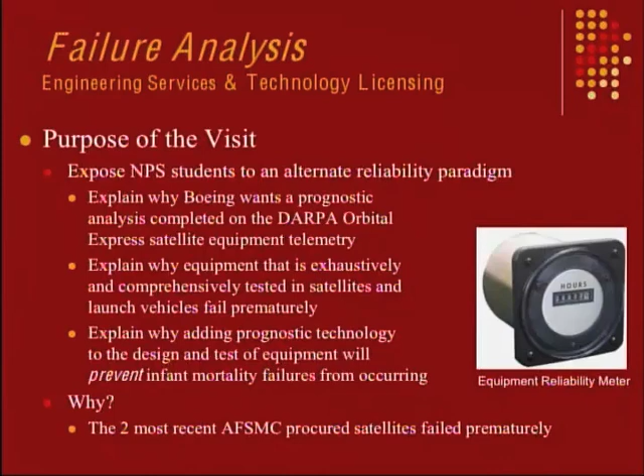The AEHF satellite, the communication satellite — the apogee engine didn't function, it wouldn't stay on continuously. The Air Force had such low confidence in the builder, Lockheed Martin up in Sunnyvale, that they directed Lockheed to test the satellite completely twice, hoping that what happened on orbit wouldn't happen. It happened anyway.

The GPS-2F satellite that was just launched, one of its payloads, the nuclear detonation detection subsystem, wasn't interoperable with the existing satellites on orbit. So I'm going to tell you today how that can happen, how the Air Force can procure equipment that fails prematurely, as well as how the builder can build equipment that fails prematurely.

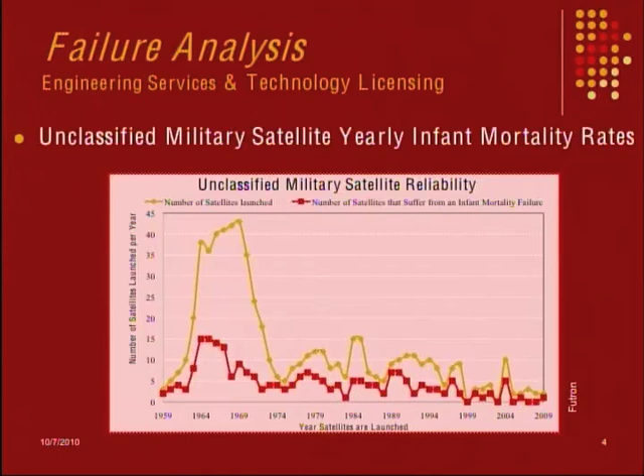To begin with, I'm going to talk a little bit about how often space vehicle equipment fails prematurely, tied in with the Orbital Express mission. This chart shows in red the number of satellites per year that failed since 1959 within the first year of use. The actual numbers aren't important, it's just to show that every year since 1959, a small group of unclassified military satellites failed prematurely. The more satellites that are made, the more that fail prematurely.

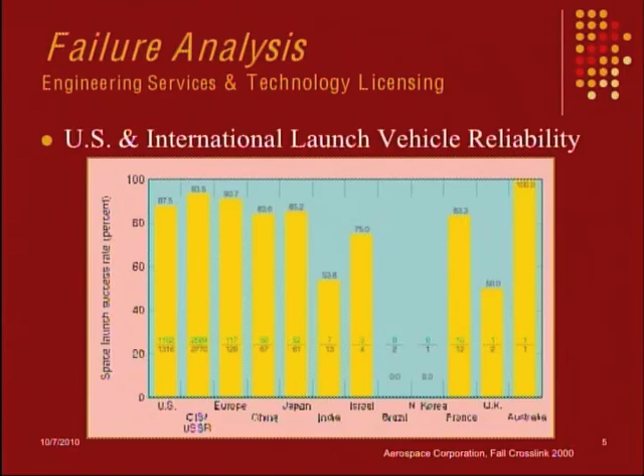This is a chart that's almost unreadable, but these are for launch vehicles, U.S., Russian, European, Japanese, etc. This is the percentage that have been successful. You can see 100%, and about 10 or 15% of U.S. launch vehicles failed prematurely, and likewise for all the different countries. I'm going to elaborate on this data in just a little bit.

This is just a summary: using game theory to understand launch vehicle and spacecraft reliability. This is kind of a new application of game theory.

What these are called are learning curves. When a guy decides to sit down and write a video game, he's interested in knowing how difficult he should make it. These graphs show effort on the bottom versus results. This is just a regular learning curve. This would be a shallow learning curve. This is a steep learning curve. This is a learning curve created when you can build on your experience. This is a curve where there's virtually no learning necessary — we call that being able to use intuitive reasoning.

This learning curve shows 3 different video games. If you learn how to play this video game here, then you can use it on the next video game and the subsequent one. That's sort of the way people who play video games would like it to be — you learn to play one very well, and you'd like to use that skill on another. This chart just shows results with no learning curve whatsoever.

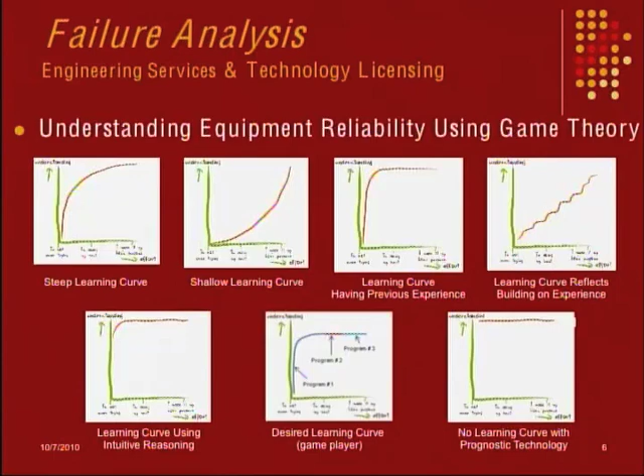So this is the information that's really important to understand reliability — effort again versus results. This is data produced by Aerospace Corporation, for launch vehicles — every launch vehicle the U.S. has produced since 1956, including the Russian launch vehicles here.

Both operational launch vehicles as well as historical launch vehicles. I just wanted to show you these are the learning curves for these launch vehicles. Mind you, some of these launch vehicles have been produced and used for up to 50 years, and the best that they can do is roughly about 90%.

So what these curves show — the fact that every launch vehicle, even the shuttle, where's the shuttle at? Even the shuttle had one of those learning curves that was on the previous chart. This indicates that absolutely no experience was used from one launch vehicle program onto the other.

When a vehicle, such as a satellite or launch vehicle, has a learning curve of this size, which matches the initial learning curve on the previous chart, it's indicative that no experience was used. That means the Air Force, the military, was never able to share experience among launch vehicle programs. We can do the same curves for the standard product lines of satellites and spacecraft that companies now produce, dating back to the early 1980s.

The spacecraft — the satellites that are often sold for military applications, produced by the dozens and dozens — share the same kind of learning curve. Again, that's indicative that we're not able to share experience across programs.

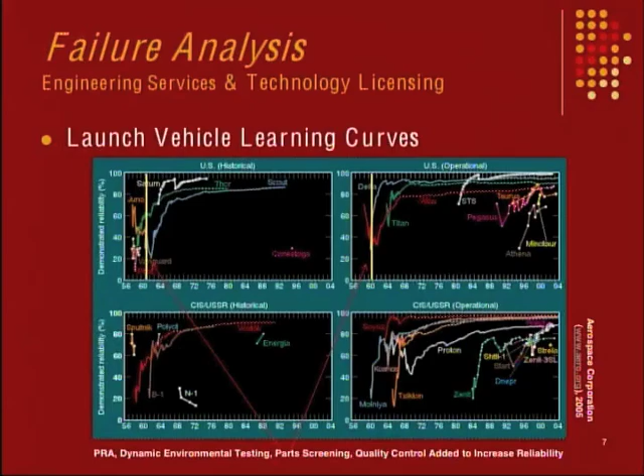Although the company's name is Failure Analysis, we don't do failure analysis. We went to the next step. We're not interested in doing analysis for equipment that failed — we're interested now in stopping equipment from failing prematurely altogether.

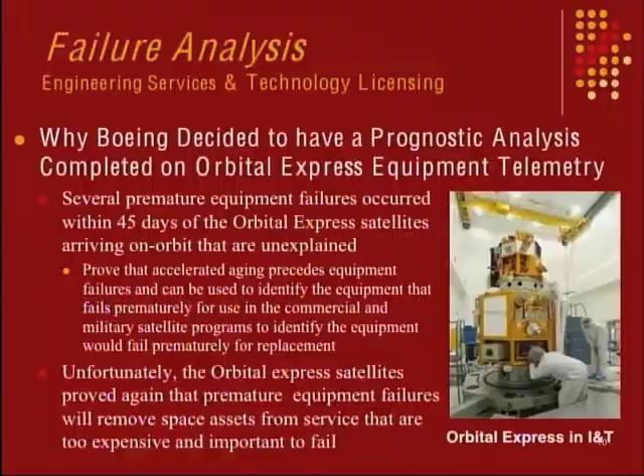We want to stop, we want to have contractors produce equipment that will not fail prematurely. We believe that space systems are too expensive and too important to fail. And so the technology that we offer now is a result of understanding why equipment fails in the first place, so that you can eliminate those failures from occurring in the future. Also in today's lecture, I hope to explain to you why the tools called failure analysis and root cause analysis are the wrong tools to use when you want to produce equipment that won't fail prematurely.

This is a chart that was developed by Aerospace Corporation. Back in 1989, they published a report trying to justify the extreme cost of testing satellites at the factory. They took a look at 60 satellites from a variety of suppliers and went through the factory testing. Mind you, this is equipment that's already passed the dynamic environmental factory acceptance test program - the shake and bake, the vibration, acoustic, EMI, electromagnetic interference, electromagnetic compatibility testing - all of those things done at the factory to try to make sure that whatever is produced won't fail prematurely, that it will be able to meet its mission lifetime.

What they found after this equipment came from the suppliers and arrived at the vehicle integrator was that of all that equipment per satellite, every single satellite of the 60 that went through factory tests suffered 4 mission critical failures. They used this data - these 4 failures - and said, well, if these 4 failures hadn't been found in factory tests, they were going to occur on orbit.

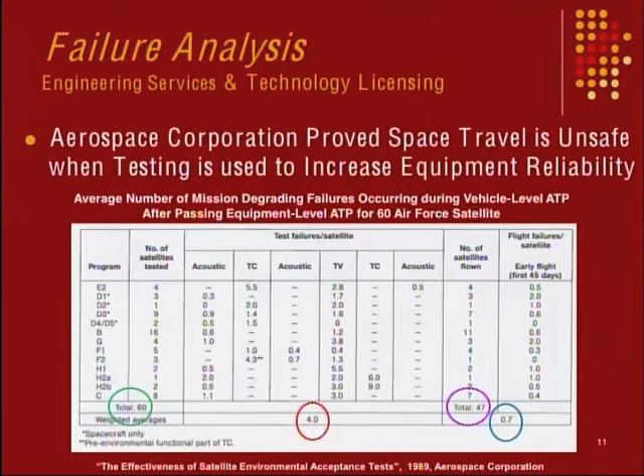The one thing they didn't realize with these 4 mission critical failures was - remember, this is equipment that hasn't gone to space yet, still on the ground, hasn't received the dynamic environment of a launch vehicle, the shock from separation, and things like that. This is equipment while it's still on the ground. They failed to recognize that when you've got 4 units failing per satellite, the factory test process is inadequate. If you're producing equipment that fails prematurely before it ever gets to space, there's something wrong with the process. And that's what they failed to recognize. They just assumed that equipment as complex as this, whenever you work in this environment, it's got to fail prematurely for whatever reason. So they never concluded that the factory test process itself was the problem.

This chart is called a Weibull distribution curve, and it's used to understand failures in time over a 10-year life of a complex system such as a satellite or an aircraft - really any complex system. This chart shows the rate of infant mortality failures, equipment that fails prematurely on a complex system over a 10-year period. The red dots are the infant mortality failures. The blue dots are the normal lifetime failures.

Some of these infant mortality failures actually occur because you replace equipment that failed prematurely, and then some of that replacement equipment fails too, creating this long period of infant mortality failures. We said, well, if you eliminate infant mortality failures here, you are producing equipment with 100% measured reliability. Since equipment reliability is dominated by infant mortality failures, if you get rid of infant mortality failures, you're producing 100% reliable stuff - and that's what we're trying to get to.

And so what we did was we were able to come up with what's called prognostic technology. You're able to identify the equipment that's going to fail prematurely by searching the test data with very specific algorithms, searching for what's called transient behavior.

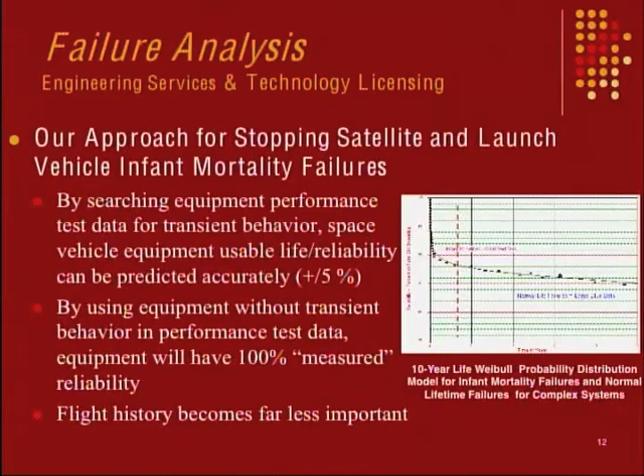When you do this process, flight history no longer is important to reliability. So our approach for stopping satellites and launch vehicles that fail prematurely was we discovered the presence of transient behavior. In other industries, these are called prognostic markers, prognostic identifiers, failure precursors, or accelerated aging. We concluded that the factory acceptance test program was inadequate.

We then discovered that all measurements taken during factory testing are performance related. That means there are absolutely no measurements taken that have anything to do with equipment reliability. All of the measurements taken on equipment at the factory is performance based.

How well is it working? If you've got reaction wheels, are they spinning at 2200 RPM? If you've got an RF transmitter, is it putting out 3 watts? If you've got a 5-volt line, is it remaining at 5 volts? All of the measurements are performance related. That's why equipment has been failing prematurely - none of the testing done in the production of equipment and vehicles for acceptance testing is related to reliability.

So we said, if you want to identify how long the equipment's going to last, you have to develop a measurement that defines the remaining usable life. And that's what I'm here about. So we developed the algorithms that identify the accelerated aging, or the prognostic markers, in the test data. And from that data, we can then calculate how long the equipment's going to last.

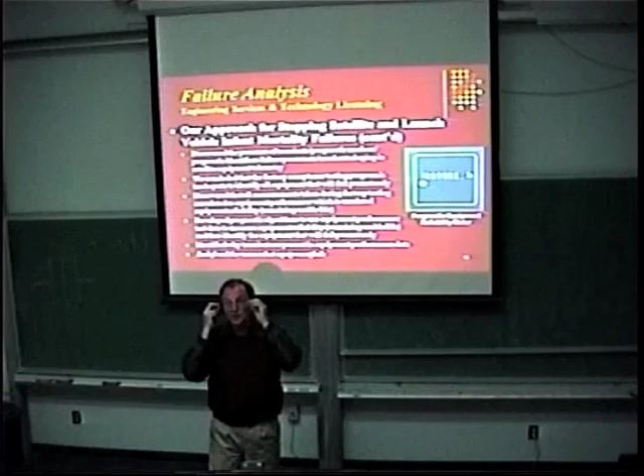Okay. And so what that means for on-orbit satellites, if you're doing this analysis that we offer, is you can identify the equipment that's going to be failing up to 1 year in the future. And so you can then, instead of suffering from surprise equipment failures, which often put the equipment at risk of total failure, you can manage those equipment failures to a positive conclusion.

Quite often, equipment that's going to fail prematurely, once it's identified, if you change the conditions that it's operating in, normally the temperature environment, it can extend the usable life of the equipment. It also offers you an option to turn off the equipment that you know is going to be failing and turn on the backup equipment so that you won't have any interruption in payload services, for instance.

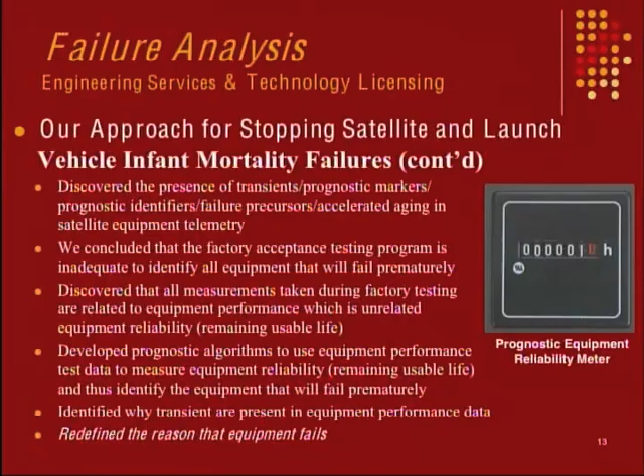And so we've suggested to the NRO that the NRO has very poor on-orbit reliability for their satellites. They're always either not getting up into space or the payload's being turned off because they're having so many premature equipment failures on orbit. This will allow them to be able to predict what their space asset availability is going to be for the next year with great certainty, where right now it's strictly the equipment failures that occur that take the satellite data offline. It just happens sporadically and randomly.

And so we've suggested that the NRO use our ability to do this so that when you're doing strategic analysis, as Strategic Command does when they're trying to figure out, based on the threat environment, what assets are available, it's kind of important to know what space assets you've got in the next year so that you can do that plan. And so that's what our technology offers for on-orbit satellites as well.

So this is just a test plan for the TT&C subsystem, and these are the different tests that are done in the acceptance test program, showing which measurements are taken in which tests. But these are the kind of measurements that are taken for the telemetry and commanding subsystem. Ranging loop stress, a performance measurement. RF output, that's a performance measurement. Bit error rate, that's a performance measurement. Output power, that's a performance measurement. Spurious and harmonic outputs.

These are all performance measurements for equipment. That's why equipment has been failing prematurely, because all of the measurements taken in factory tests are related to performance and not reliability. I think over the decades we kind of hoped that there was some relationship, that if the equipment was functioning normally during test, that meant somehow it was going to last like it was supposed to, and it just doesn't. There's actually no relationship between performance and reliability.

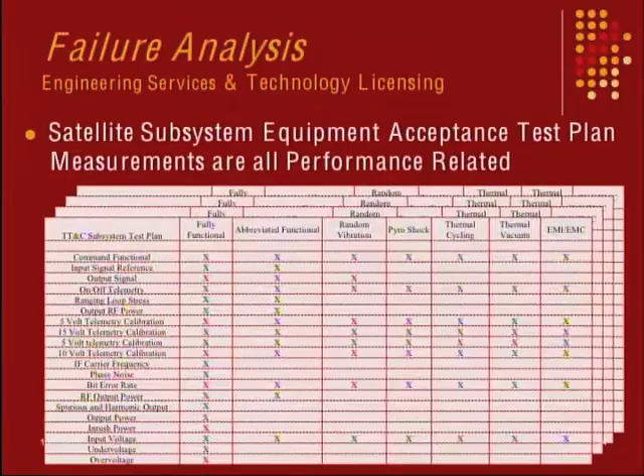And so the existing space vehicle paradigm is presented pretty much in the Mil Handbook 217 or updates of it, which is the reliability analysis. And we call everything that's associated with the military handbook reliability analysis engineering. All of the tools that are used to understand equipment performance and reliability, we call that diagnostic technology. And diagnostic activities, that's things like equipment failure detection, isolation, and recovery activities, failure analysis, root cause analysis, data trending, equipment troubleshooting. Those are all reactionary kinds of things that you do after a failure has occurred to help you understand what happened in the past with great certainty.

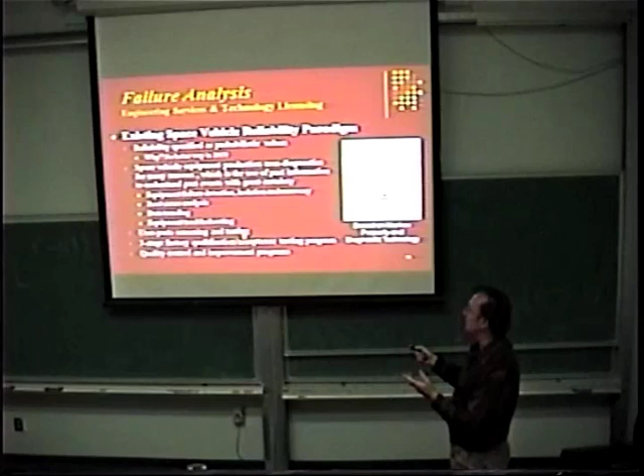And what we're talking about is including things like part screening, where you screen the parts and test them, operate them for a while, trying to do a little burn-in and get the poor reliability ones to fail prematurely, including the three-stage qualification and acceptance test program, and even quality control improvement programs. These are all part of what we call the diagnostic tools that have been used.

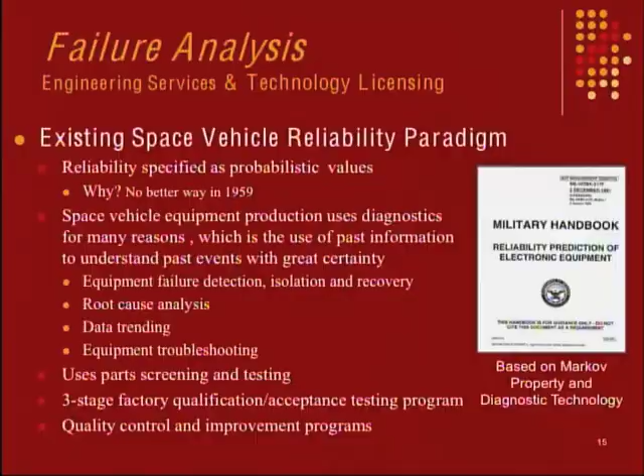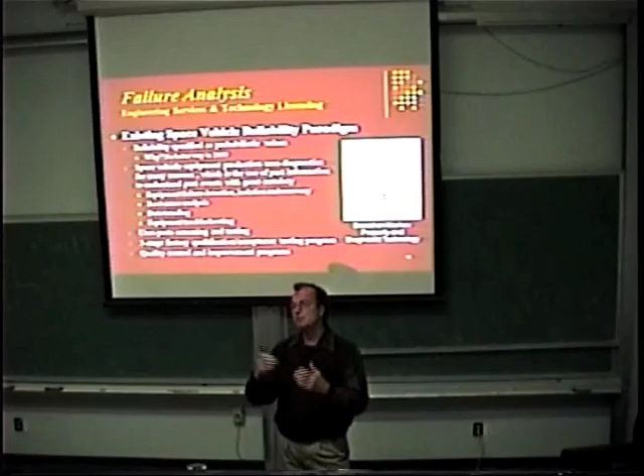What we want to bring about is the tools of prognostics or prevention. When you no longer have equipment that fails prematurely or surprisingly, you don't need diagnostic tools. If the equipment's not going to fail in a surprise manner, you don't need these kinds of things, and it kind of makes them obsolete. And that's really our goal.

The cost to increase the reliability off of this 85% reliability goes to infinite. When you're dealing with probabilistic results, you can never achieve 100% no matter how much money you spend.

And that's why it's such a paradigm change when I talk about 100% reliable equipment versus probabilistic results, where you can never achieve 100. And so it causes people to doubt that it's even possible, because they understand this relationship, that you can never spend enough money when you're dealing with probabilistics to ever achieve 100%. And so it's very confusing.

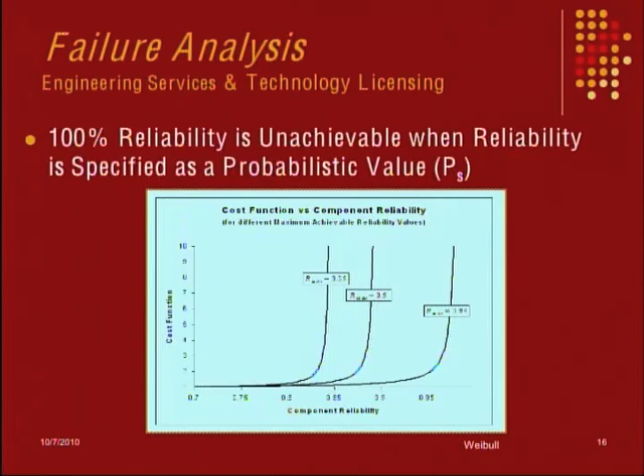I talk about measured reliability versus probabilistic reliability. Two completely different terms. So this is the current AFSMC space vehicle procurement paradigm. We are now paying companies to produce equipment that fails prematurely. We're one of the very few industries that continue to do that.

If you're in consumer electronics and you're producing products that fail prematurely, that's out-of-pocket costs. And so it was those companies with out-of-pocket costs that developed the ability to identify the products that were going to fail prematurely, so they wouldn't ship them to the customer. And so with the AFSMC procurement process, they are still stuck in the old paradigm of continuing to pay companies to produce space vehicles that fail prematurely.

And so they have these companies now, the Boeings, the Orbital, the Lockheed Martin. When you say, hey, we can now produce equipment that doesn't fail prematurely, their response back to us is, we don't have to. All of our contracts say we get to produce equipment that fails prematurely. And they're right.

And so they have no motivation to change what they're doing until the customer, the Air Force, the military, the Navy, whoever's buying satellites, decides to change that reliability requirement from a probabilistic one to a hard remaining usable life. Or one that says, in the test data, there will be no accelerated aging. You ship only equipment to the launch pad that has no accelerated aging, no prognostic markers, no failure precursors in the test data. That's another way of stating it.

Because what's happening is the equipment that's arriving at the launch pad, both from the equipment supplier and from the vehicle integrator, has got this data in the test data that indicates the equipment's going to fail prematurely.

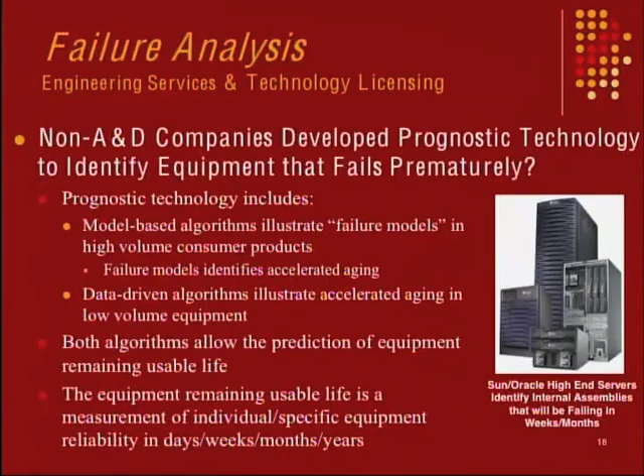It can do so because during the time that they looked at the data, the equipment performance was good. Everything was working fine. Remember what I said, the measurements that they take in test are all performance related. They don't look to see if any of the equipment data has accelerated aging in it. So by the time this thing got on orbit, at least one part that had accelerated aging in it had aged so much that it changed the behavior of the circuit.

The timing circuit, the summing circuits that were bringing in the data to determine whether everything was okay on the satellite. At the factory, the equipment ran just fine. But once it got on orbit, those parts aged and likely caused the failure. The failure analysis hasn't been out yet, but I'm giving you an example of how that can happen. There is at least one part in the control electronics for that Apogee engine that is suffering from accelerated aging, changing the performance of that circuit that was used to control the Apogee engine on the satellite.

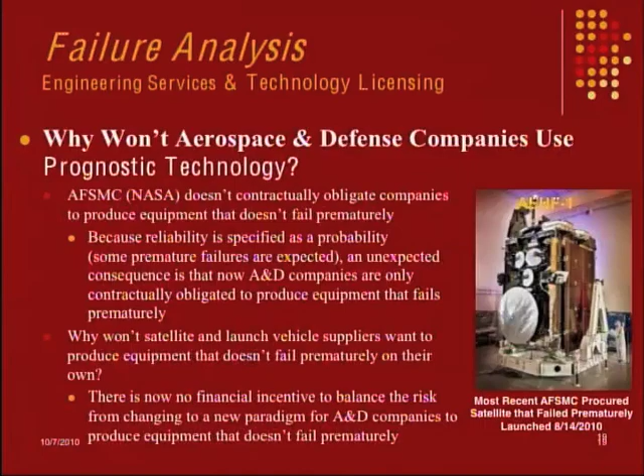So this particular satellite was about $2 billion because it was the first model. The other ones are cheaper than that because of the recurring costs, the way the non-recurring cost goes down. But this one in particular was $2 billion, and it was put through the acceptance test program twice, hoping that what happened on orbit wouldn't happen.

This is why I want to mention why AFSMC required space vehicle suppliers to adopt reliability analysis engineering way back in 1960. When reliability analysis engineering was adopted back in the 60s, it wasn't because it was the right thing to do. It was just the best idea that anybody had at the time. And so this has been now 50 years, and some progress has been made, and some new understanding has occurred. And so we want to change reliability analysis engineering using probabilistic results to equipment that

won't fail prematurely. The basis of reliability analysis engineering is the Markov property. It says that behavior is random and instantaneous. Remember what I said about failure precursors and prognostic markers. The reason that this transient behavior isn't recognized to exist in the space industry is because the Markov property prohibits it. If you believe that the Markov property is true, no behavior from previous is related to the behavior now.

And so, since the results from reliability engineering are used throughout the space industry, what we think happened is that the reliability guys' belief that equipment failures are instantaneous and random leaked into the thinking process of the engineers who adopted that, who now today agree that equipment failures are instantaneous and random.

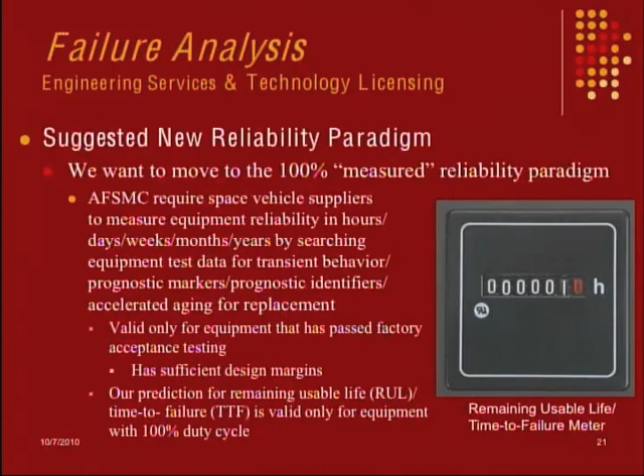So our suggested paradigm is, we want to have a reliability meter. Our algorithms work as a reliability meter. You hook it up to the equipment, and it will measure the remaining usable life of every unit that has telemetry available from it, any kind of performance data. If it's greater than a year, it says it will not fail from a premature equipment failure; it will last at least 1 year with certainty. And so that's an all-new paradigm in reliability.

In the factory, we break it open and we replace this part. We put in a new part, button it back up, put it back on the spacecraft, operate it, and then the next part will fail. We take it off, rip it open, and replace that second part that fails. We do this 4 or 5 times. Finally, maybe at the 4th or 5th time, the material control guys will say, gee, I guess the reliability of that unit's been compromised, so let's scrap it, okay?

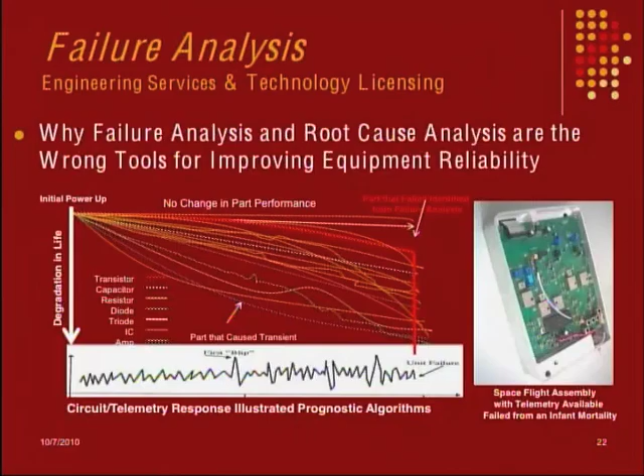So you're saying you get that stream of data across the bottom of the chart? Right. So we look for this first transient. From this first transient, we can then predict the remaining usable life based upon 30 years of doing this. These are the other transients that occur, triggered by the part that's got the highest degree of aging characteristics. We look for all these transients.

And this behavior is never reproduced. You can't use pattern recognition software to find it. If you see it in one unit, you can't use that behavior to find it in another one. The variability in the parts in the circuit is such that you never see this kind of behavior twice. And that's why you can't use pattern recognition.

Now, let me say, in aerospace equipment—in consumer products, where they're building thousands and millions of units, they do come up with failure models that they embed into failure pattern recognition software. But in the aerospace and defense industry, we're fairly low volume, and so it doesn't work for us. We assume you never see the same pattern twice. Our tools are developed for the onesie-twosie design, low volume kind of equipment and vehicles.

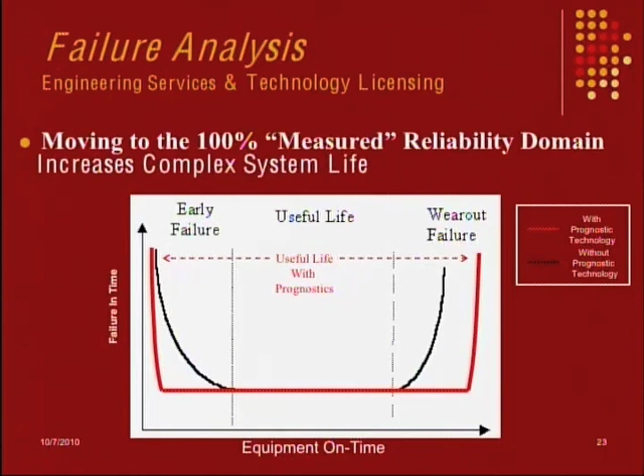According to Aerospace Corporation, both military and commercial space missions have a 25% infant mortality rate within the first year. 1 out of 4 military programs will not be functional within 1 year of being launched, either from a combination of launch vehicle failures or on-orbit satellite failures.

And that 25% rate is even seen in the commercial space industry. They do almost exactly the same thing that NASA and military space does in terms of testing. They do virtually the same thing.

And so that's what we're trying to do. We're trying to take that 25% failure rate and knock it down to under 5%, maybe 2, 3, or 4%. Because there are still some failures, for instance from the launch pad, things that can occur that will cause a failure. So there are still going to be some things that happen that we don't fix. But you're going to take it from 25%, hopefully down to under 5%.

And when a satellite is $2 or $3 billion each, including the launch vehicle and everything else, it's quite a savings.

So, from the awareness gained from adopting the prevention paradigm we're talking about, rather than the reactive paradigm we currently have, three things happen. Three things you learn. If you're going to test equipment, you're testing to measure equipment performance, and that's very important because there are performance specifications that the contractors have that you have to meet.

But if you're testing equipment, you have to realize that you need to add in a measurement related to the equipment's life, and that's what we offer in our technology. So people already measure the equipment's performance. We want to measure the equipment's remaining usable life.

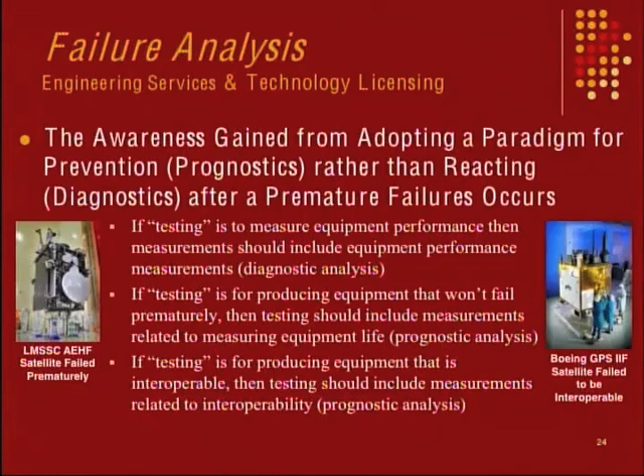And so here's an example of what we find in our test data. This is for a gyroscope on the Hubble Space Telescope. Gyro A, Gyro C, Gyro B.

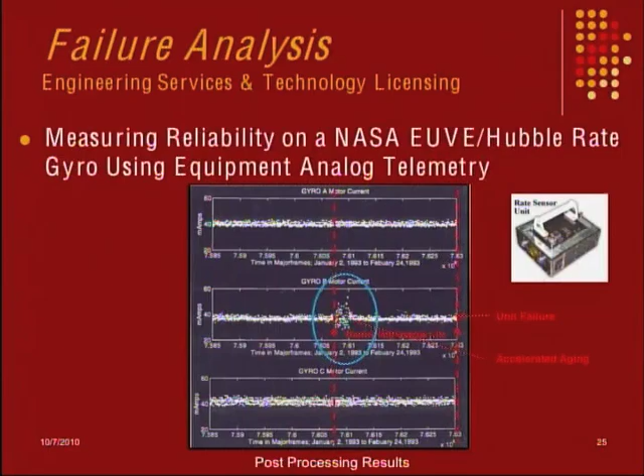This is what we identify as prognostic markers: accelerated aging, failure precursors. This time scale is proprietary, but it's under a year. Most commonly, we are able to identify remaining usable life of about 5 months. Once we identify this behavior in the data, it will often operate until at least another 5 months before it fails. Here's some more examples.

Any questions? I want to get you guys out.

So it sounds like the two benefits are 1 year on orbit initial, and then you guys give someone about 5 months to get their act together before the failure. Yeah, instead of somebody guessing.

So are you guys doing any work on algorithms to extend out that 1 year? We are. Our 1 year is based on actual achieved results. What we need to do, instead of working in the millivolt, milliamp range of data, is get down to the micro milliamps, millivolts in terms of behavior that we're looking at. And we don't anticipate that happening anytime soon. So that's an order of magnitude we've got to improve on our accuracy of the data that we're looking at.

Question: if a mission's already been on orbit and an anomaly did happen, and you did your diagnostics, how does that affect your 1 year prognosis? We do that too. That's what we do. When you've had an event, we will go back and look at the past data and show you where the behavior was that was missed by the engineers that indicated it was going to be failing. So we have those results in our database also. We have that type of analysis to do also.

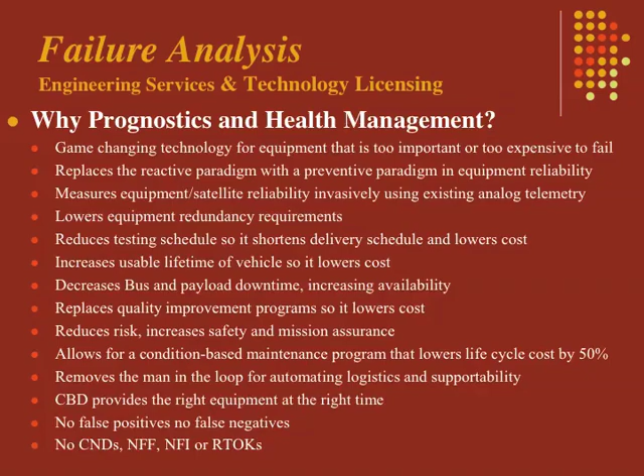What we do is, when we come into a factory, because the space industry has never recognized transient behavior, we can walk into the production process and find the instructions in the test procedures telling the test engineers to ignore transient behavior, and we identify it and get it changed. It'll be right in front of the people: instructions to ignore the very data indicating that the equipment's going to be failing prematurely. Because the space industry has ignored the presence of transient behavior since day one, because of the Markov property. If you want to use the Markov property, there's no such thing as transient behavior related to equipment failures.

You're obviously working with existing telemetry. Is there any sort of change in the sensors or additional measurements that can be built into satellites that would improve this? None of the systems right now have been designed to work with prognostic technology.

Contractors often get to argue to cut out the very data that we use, telemetry. They'll instrument maybe about 90% of the equipment on board. We want them to do 100% of all active electrical and mechanical equipment so that the data will be available in future spacecraft. The other thing we want them to do is operate the equipment as long as they can while it's at the factory on the ground to collect that data. Right now they turn everything off in between tests and they're not running it to collect data because they're saying, hey, we've measured the performance. That's the only use they're using the data for is performance, and then they just shut everything off.